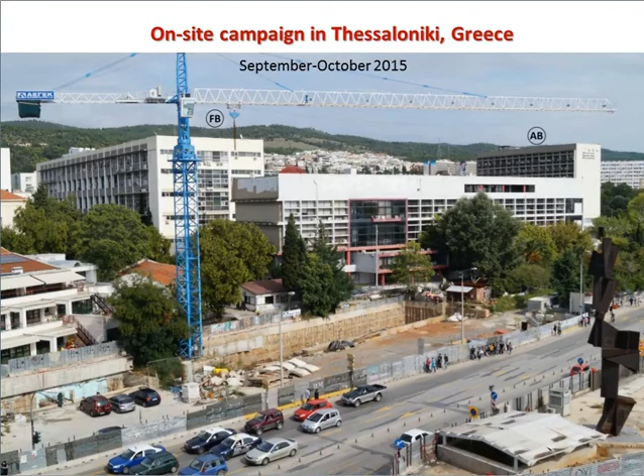The measurement campaign in Thessaloniki took place in September-October 2015. 2 buildings of the Aristotle University of Thessaloniki were investigated: the administration building and the building of the Faculty of Philosophy. The building of the Faculty of Philosophy was designed and constructed in the 1960s. In the current state, it is a 5-story building consisting of 3 structural units divided by 2 separation zones.

The bearing structural system of the building is represented by reinforced concrete frames and an elevator shaft located in the center of the building. The administration building was also designed and constructed in the 60s of the past century. It is an 8-story building. The lateral load resisting system comprises reinforced concrete frames and an elevator shaft. The shaft is located eccentrically in the floor plan, and therefore it may cause torsional effects in the building performance under seismic vibration.

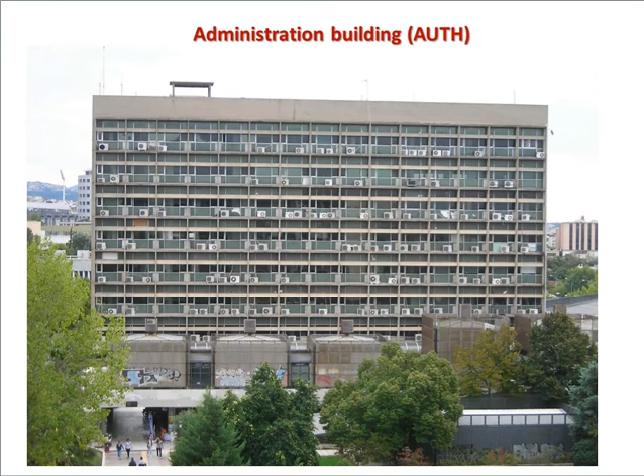It is important to note that both buildings were designed in accordance with the old National Code of Greece, where on the one hand the estimated seismic hazard for the site was much lower in comparison with the current code, and on the other hand the ductility requirements were ignored.

The measurements in Cologne were conducted in November-December 2015. With the support of the municipality of Cologne, we established direct contacts with 7 schools of the city. The administration of the schools showed understanding of the problem and interest in the cooperation. For some of the schools, the structural drawings of the buildings were provided by the school administration. However, for most of the buildings, no construction documentation was available. Therefore, the necessary information was collected on site.

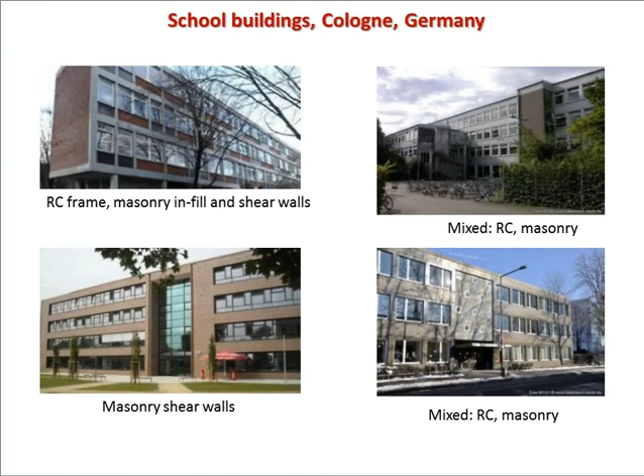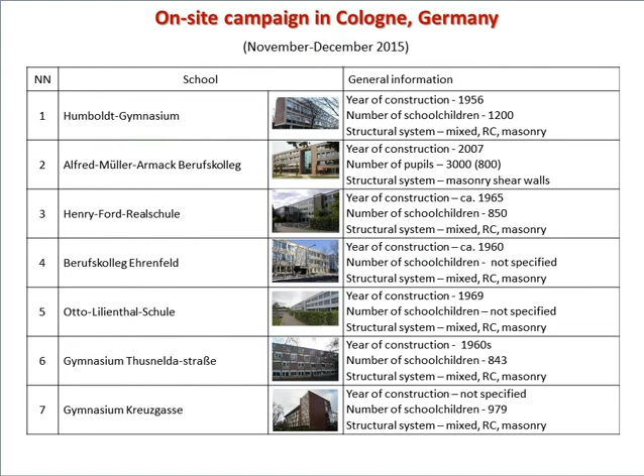The schools are located in different parts of the city. The investigated buildings are of different size, different year of construction, and different structural types. There are in particular reinforced concrete frame buildings, buildings with masonry shear walls, and buildings of dual structural system. For all the schools, the program of investigations included ambient vibration measurements, both outside and inside the buildings, as well as visual structural survey and in situ inspection.

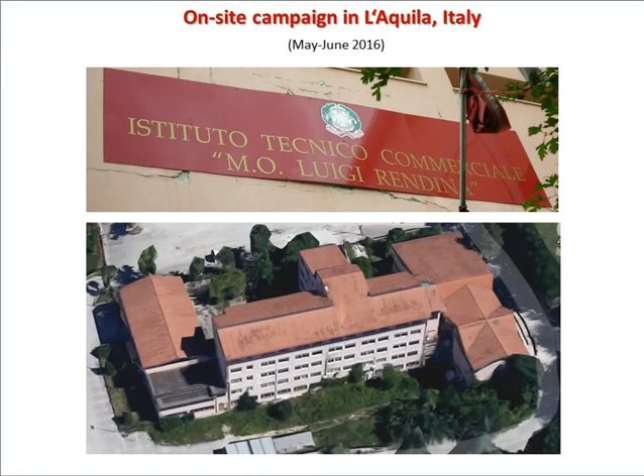The measurements in L'Aquila were implemented in May-June 2016. The building under study was seriously damaged during the notorious earthquake of 2009. Since that time, the damaged building is closed by the local civil protection authorities. The Sibyl team had no preliminary information about the building. No construction drawings were available. Therefore, this was a typical situation when the information necessary for structural modeling and seismic evaluation of the building was collected immediately on site within limited time frames. In this case, it took about 2 hours.

The program of investigations also included ambient vibration measurements as well as visual structural survey and in situ inspection. The in situ investigations showed that the bearing reinforced concrete frames sustained the ground motions during the earthquake of 2009 quite well. They seem to be in a good condition and can serve their function, while the infill walls, which are made of fragile hollow bricks, were severely damaged or even destroyed.

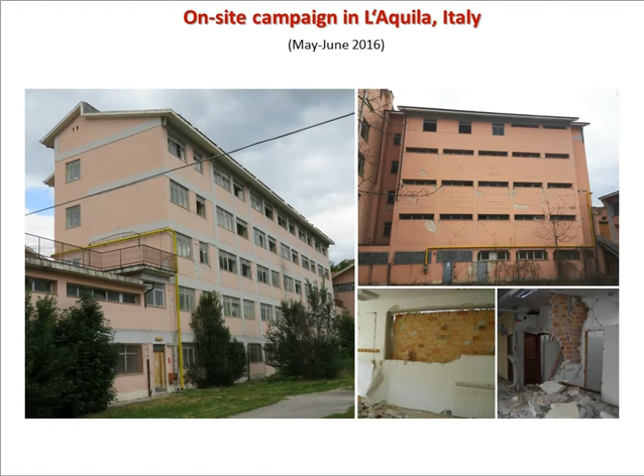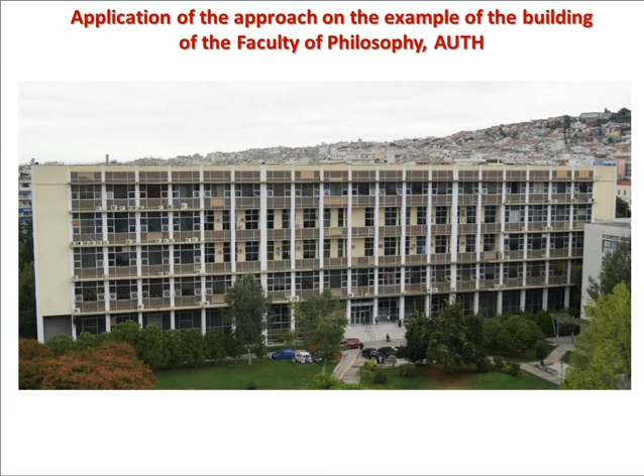More details about the findings and results of the case studies can be found on the website of the Sibyl project. Now we can pay some more attention to the case study in Thessaloniki and consider in more detail the example of the building of the Faculty of Philosophy. As mentioned before, the measurements in Thessaloniki were conducted in September-October 2015, jointly by the groups of the Aristotle University, GFZ Potsdam and TU Berlin. The activities included visual survey and inspection of the structures, as well as short-term ambient vibration measurements.

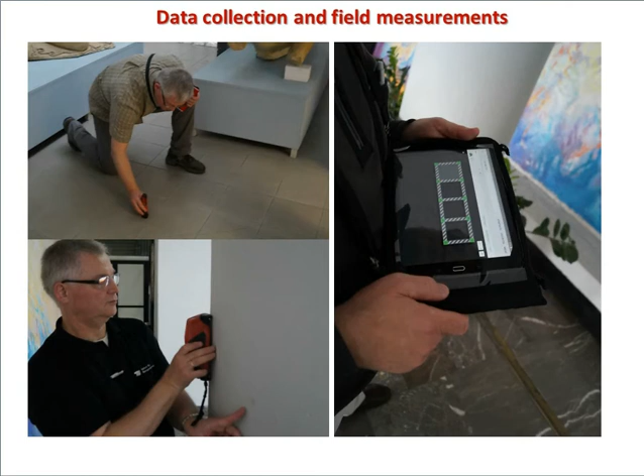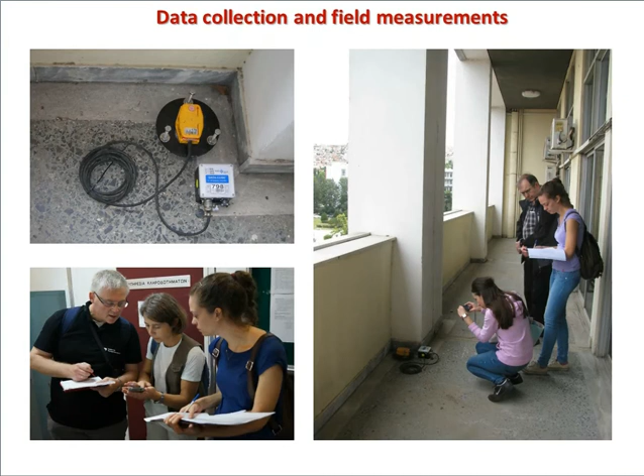During the in-situ investigations for the geometry measurements, including both overall dimension of the building and member sizes, we used conventional measure tapes and a laser distance meter. For scanning concrete members to detect the location of reinforcement bars and determine the depth of concrete cover, we use the multi-detector Hilti PS50. The vibration measurements were performed using geophones connected to data loggers, which were placed in selected parts of the building, and their location was carefully documented.

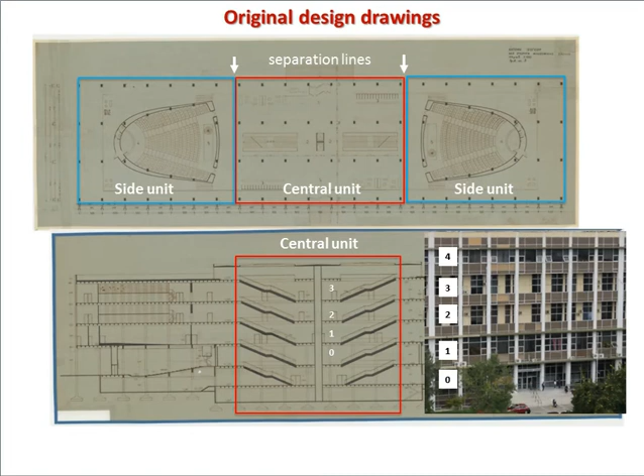The construction documentation provided by the partners from the Aristotle University included some architectural drawings and limited specifications containing information about the building and its parts. However, the available documentation was not complete. In particular, information about some structural details and properties of materials was not available. And moreover, as it was found out in the course of the in-situ investigations, a considerable part of the preliminary available information was incorrect. In particular, one additional floor was detected on site in comparison with the original design drawings.

It was found out later that the building was modified 20 years after the construction. However, there is no related documentation. Moreover, some considerable discrepancies, in particular in cross-sectional dimensions of structural elements in comparison with the original drawings, were detected during the conducted in-situ measurements.

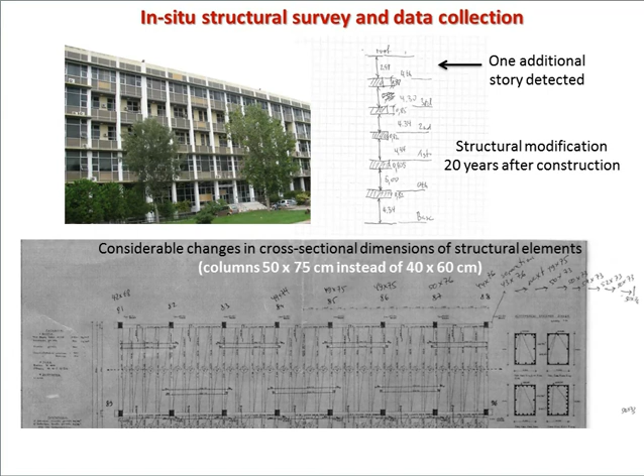These findings emphasize the importance of in-situ inspections for assessment of existing buildings. Structural modeling and analysis solely based on the original design drawings may produce misleading results and therefore inadequate decisions. Even limited inspection and short-term monitoring of the state of existing buildings can considerably contribute to the quality of structural models and improve the results of vulnerability analysis.

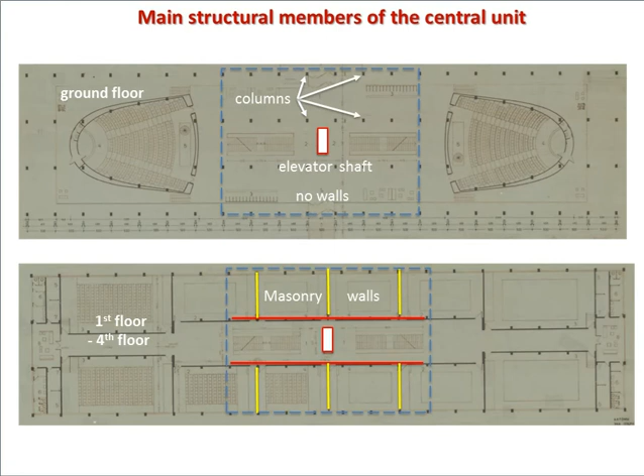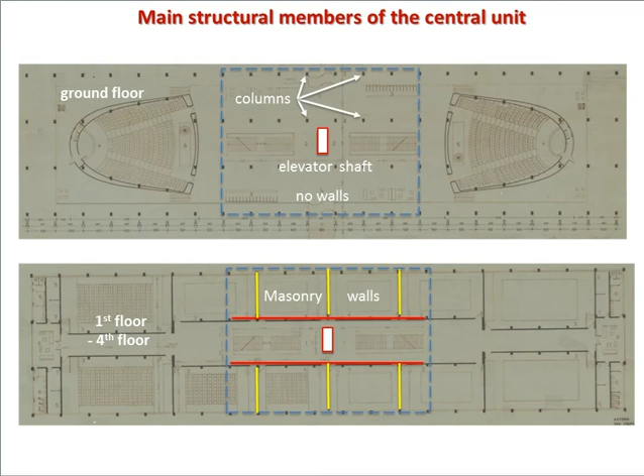For the simplified structural analysis, we focus on the central part of the building. For modeling the building, we take into consideration that the structural system is represented by moment-resisting frames composed of reinforced concrete columns and beams. The lateral load-resisting system is complemented with the reinforced concrete elevator shaft located in the center of the building. On the upper floors, there is also a system of masonry walls defining the internal functional arrangement of the building. The walls do not belong to the support framework, however they contribute to the stiffness and mass of the structure. Therefore, they have also been included in the structural model.

The structural system is completed with reinforced concrete floor slabs, providing the spatial integrity of the building as a whole. The modeled system is considered fixed at the ground level, and for the sake of simplification, we do not take into account possible influence of the underground part of the building, and neglect possible ground structure interaction effects.

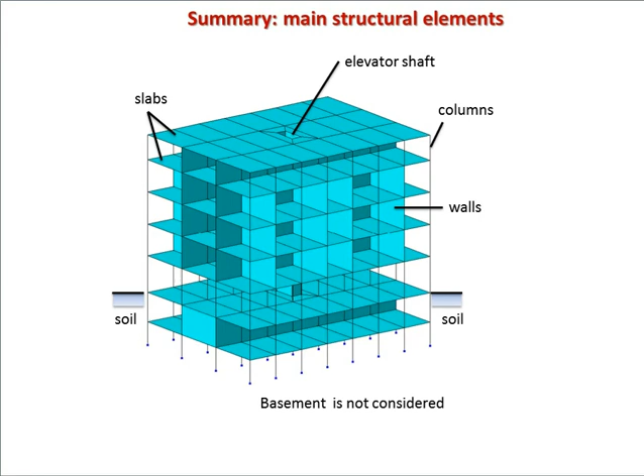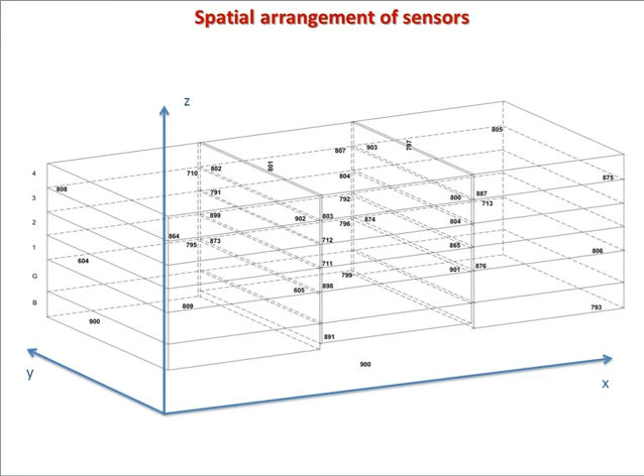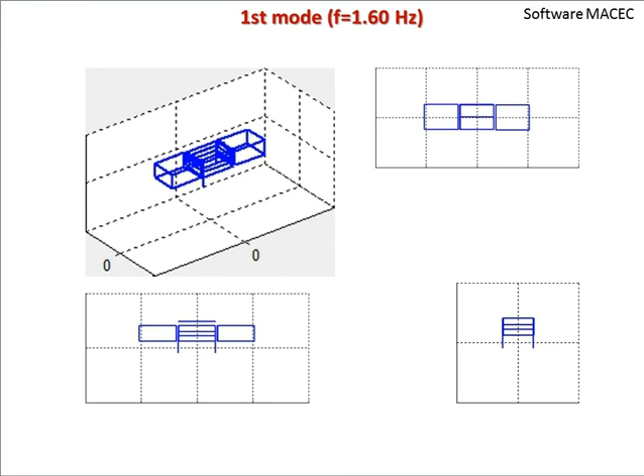The modal analysis was implemented with the help of the MACEC software, using the stochastic subspace identification approach. Several 3-minute long recordings selected in the different periods of day and night were analyzed and compared. The calculations for all the analyzed recordings gave very similar output. Here you can see the 3 vibration modes obtained from the operational modal analysis. The obtained fundamental frequencies for the 2 bending modes are equal to 1.6 Hz in the lateral direction and 1.72 Hz in the longitudinal direction. The frequency corresponding to the torsional mode is 1.76 Hz.

From consideration of the obtained results, we can see that the separation joints are only in part efficient, because there is still some coupling between the central part and the side parts of the building. In the further analysis, however, we focus on the central part only and neglect the influence of the side units.

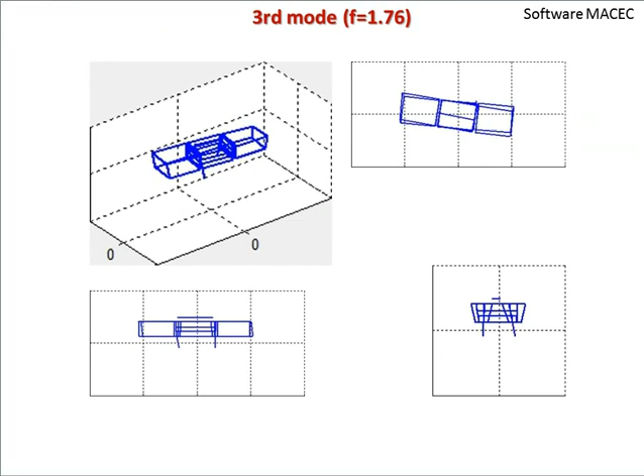In terms of the Eurocode 8, the amount and quality of available and collected information for the building corresponds to the limited knowledge. This level reflects, in our opinion, the most plausible situations in the routine practice of civil protection. The lacking information necessary for the structural modeling, in particular structural details and material properties, was updated using simulated design. That is, the required input parameters for the model were taken according to the usual design practice for such buildings.

For building assessment corresponding to this knowledge level, we developed a simplified approach based on the so-called simplified integral structural model. We have produced another video describing the methodological aspects, which is also located on the website of the Sibyl project. There you can find more details about the developed approach.

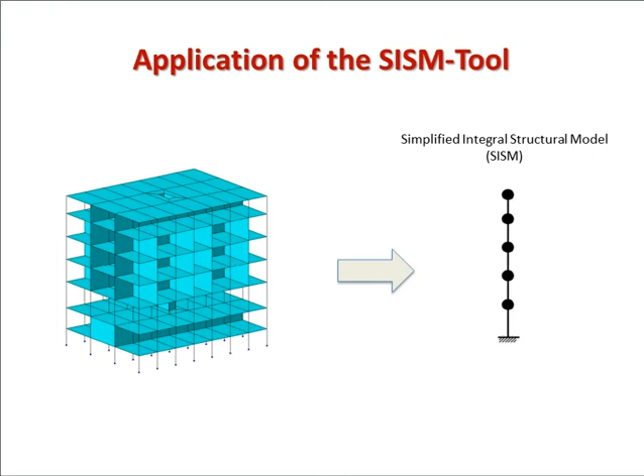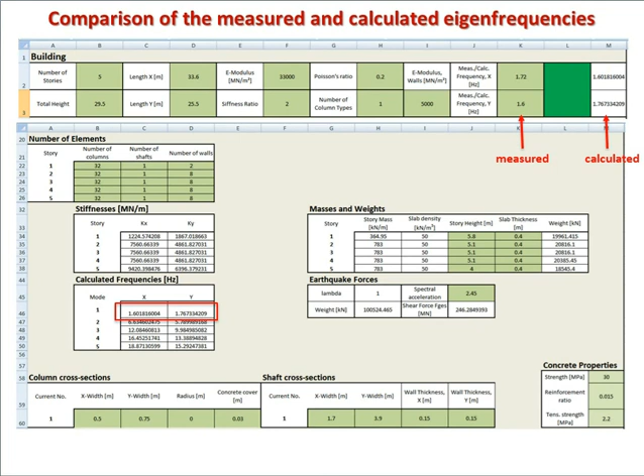Comparing the bearing capacity of the structure with the level of earthquake load for the site, with the use of this tool, we can estimate the expected level of damage. 3 possible limit states of reinforced concrete structures are considered. Limit state 1, first cracking in the concrete. Limit state 2, first yielding in the reinforcement. And limit state 3, failure of the structure.

The numerical results obtained for the building under consideration show that at the given level of seismic loading, one may expect occurrence of the limit state 3 at the level of the ground floor, while the upper floors perform much better. In particular, the results obtained for the X direction show that only the limit state 1 is achieved in all the upper floors, while for the Y direction, the limit state 2 is achieved on the 2nd and 3rd floors, and the limit state 1 on the 4th and the 5th floors of the building.

Considering the obtained results, we may conclude that the presence of the weak ground floor makes the building seismically vulnerable. Therefore, strengthening of the bearing structural elements would be recommended. At the same time, we should keep in mind that in our simplified assessment, only the central part of the building was considered, neglecting possible influence of the side units of the building. Furthermore, we have to take into account considerable uncertainties in the input parameters, inasmuch as we had to use simulated design due to the lack of reliable information about the actual parameters of the building.